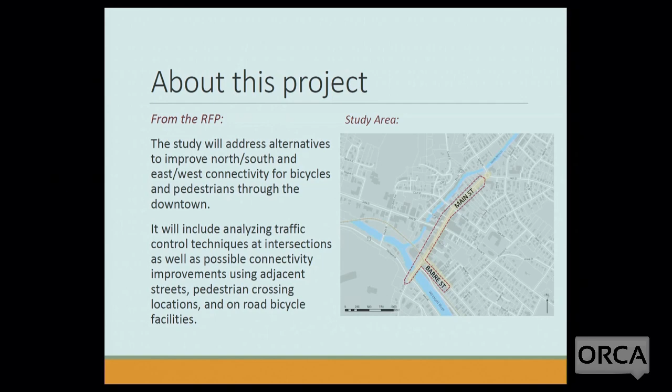So I think without any further ado, Lucy. Great, thanks. Well, thanks for making time for this. We really enjoyed working with Corey and the rest of the team and the city. And also give thanks to an advisory committee who met a number of times and perhaps may have one more meeting. And Donna was the city council representative, and a lot of members from other organizations and committees in town. And we had great feedback from the staff, and we had more people than listed at DuBois and King, but our core team was myself, Sophie, and Julia, who both live in Montpelier, so we're also really lucky to have in-depth local knowledge.

And here is the timeline that we did the study over. It was intended to be more about 12 months, but the project, as you'll see as we go through, gets quite complicated. We took a little extra time to consult with city departments and various committees over the course of the study. We had several advisory committee meetings. We met with MTIC, the Montpelier Transportation Infrastructure Committee, and then we also had a meeting with all the managers of different city departments. These were all really helpful, and hopefully we brought all that input, but this is a draft and we want to get more input from you all tonight and any further direction that we might need.

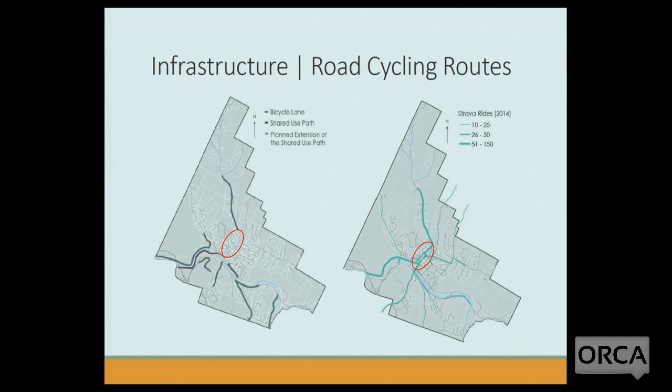The graph on the right: we have limited data on how many people ride on what streets, but we do get some data from online bike apps that people use while they're riding their bike. So it gives you an idea the places people want to ride are very much the same as they want to drive. And people want to make the connection between the paths and some of the other bike lanes in other parts of town. So again, these are the areas where infrastructure's not there, but a lot of potential demand is there.

But then there's a lot of people, and these percentages are averages from surveys done around the country, so not Montpelier specific, but no reason to think it's different. There's a big group of people that would like to ride a bike more. They are interested in riding, but they're not comfortable on what we call high stress routes, where there's a lot of traffic and no designated lanes or space for them. So really, to get more people riding in Vermont, which is the vision put out in the master plan, we really want to think about getting those people comfortable riding on the streets or pathways.

And then we looked at a lot of different types of infrastructure. This is just a range where, on the left side, are sharrows, which is nothing more than marking a bike symbol on the road, telling traffic they can expect bikes, and showing bikes that they need to kind of ride in the lane because there's not a separate lane.

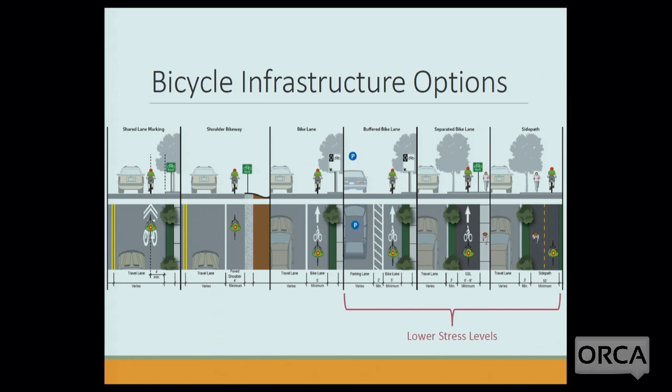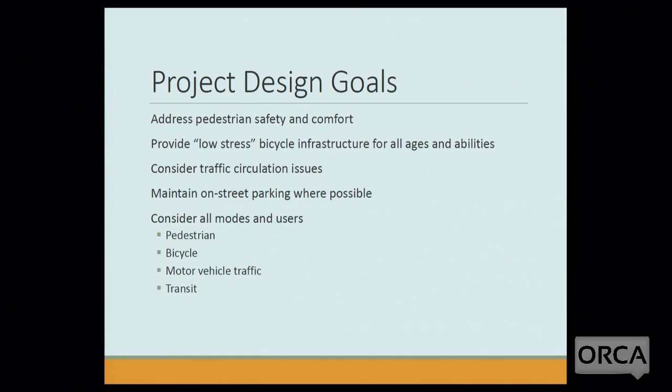And then this is a quick review of the design goals that we had in looking at alternatives for addressing this need. Pedestrians are really the #1 concern, because there are a lot more pedestrians than probably potential bike riders, and certainly existing. But we also want to provide that low stress bike network to allow a wide range of ages and abilities for people to ride. We definitely need to consider traffic circulation, because the two are all related. And another consideration is to maintain as much on-street parking as possible as a key economic and way to access downtown, and then to consider all the different modes of transportation.

So with that, we came up with 4 alternatives for different arrangements of bike lanes and intersection designs. And this is for Main Street, and then we have a couple for Barre Street I'll present later. We'll go over these quickly because these were studies that we went through, but basically the first is having traffic signals at all the intersections that need a signal, and that would be definitely at Barre Street, potentially at School Street. We did look at the School Street, Main Street intersection, and it could be signalized. It has enough traffic. It doesn't have to be, but that would be an option.

The second one is roundabouts at all the intersections, and also providing bike lanes. When we put those out, we had a lot of interest in the committee to have a third option, which would be roundabouts at some intersections, signals at others, and particularly a roundabout at Barre and School Street. And then the fourth option is really inspired by the Greening America's Capitals report, and that was a plan that looked at changing the intersections and parking on Main Street, and assumed bikes would use Elm Street and go through the Heaney-Jacobs lot, I think it's called, if I'm pronouncing it correctly. So I'll go through these with a little more illustration.

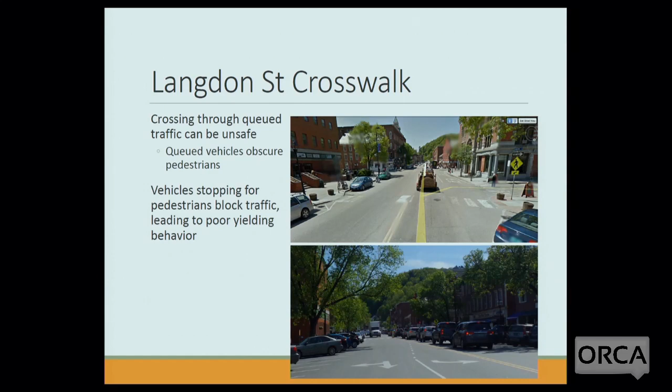So, and then the Langdon Street crosswalk was one of the topics that we looked at, and what I'll show here. We looked at a few options to relocate it. So on that diagram, the white crossing right in front of City Center is the existing crossing. One option we looked at is to bring it down, basically make it part of the signalized intersection at State Street. Another option was to move it up to the alley there, and I'm forgetting the name of the street, but it's the little Hazen Place.

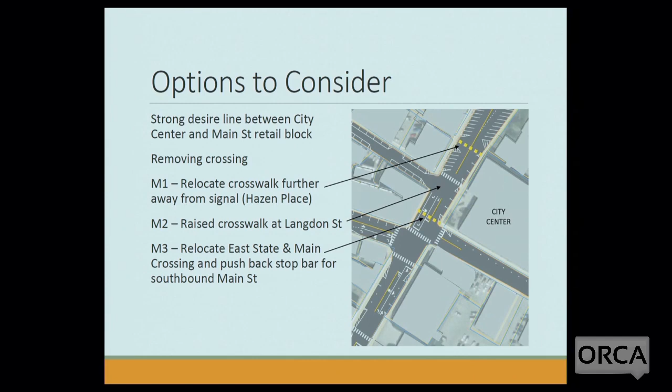And that seemed to be the one that's most preferred, and I think this is probably a topic that might have more ongoing discussion. But that brings it a little bit further from the traffic lights, so it's not so abrupt that you get through Main and State and immediately stop for a crosswalk. It'll allow a little more room for cars to stop and not feel as much that they'll get rear-ended. It's probably not going to solve every issue, but that seems to be the one that garnered the most interest in thinking about changing.

So Main and School was another concern, and again, it does meet traffic signal warrants in terms of its volume. And we were asked to look at an all-way stop there by a lot of people in comments we got, and we did look at that, but it's not a good candidate for that because there's a lot of traffic on Main Street compared to School Street, whereas the other intersection that had this treatment recently, which is Elm and Spring, has much more balanced traffic, meaning the traffic's about equal, and that's a really good place to put an all-way stop.

But this one, with a lot of traffic on Main Street where every car would have to stop, would be probably really frustrating and could create rear-end accidents. So that's just not a recommended treatment for that reason.

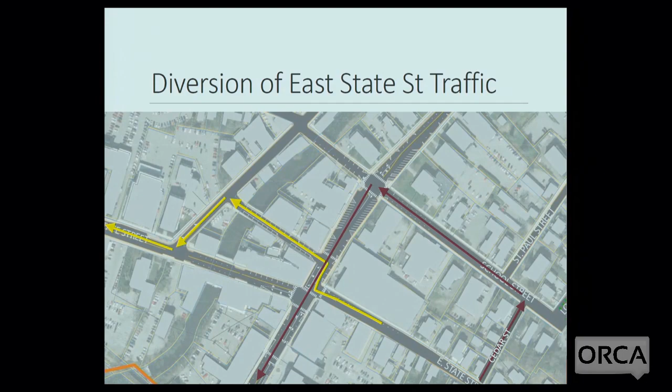And so the roundabout at East State Street, because of this and the sharing, there was a real mixed review in our alternatives workshop, so it wasn't beloved. It's intriguing, but it definitely has some concerns. And because of that, we really were asked to look at a hybrid option that would be a big roundabout at Barre Street, the first circle there, and then also a mini roundabout, or a small roundabout, at School Street. So this is what we're calling the hybrid.

And then as far as the parking and travel lanes, it's also kind of a hybrid. There's some areas that can have parking on both sides and bike lanes, and other areas, especially as you're getting near the traffic signals, where we need those left turn lanes, so we have to take parking off one side. So it's kind of in between in all those ways.

And one of the concerns of mixing roundabouts with signals is that currently there's often long queues of traffic either coming from State Street down Main Street or from Memorial Drive up Main Street. And when we have a roundabout in the midst of traffic signals like that, the traffic backing up through the roundabout will mean no one from Barre Street can move at all as those queues are there.

So it can have the effect of making it a lot harder for people to get out from Barre Street. That's during peak hour, and that's maybe 1 hour of the day, or maybe not even 1 hour of the day. So just a consideration.

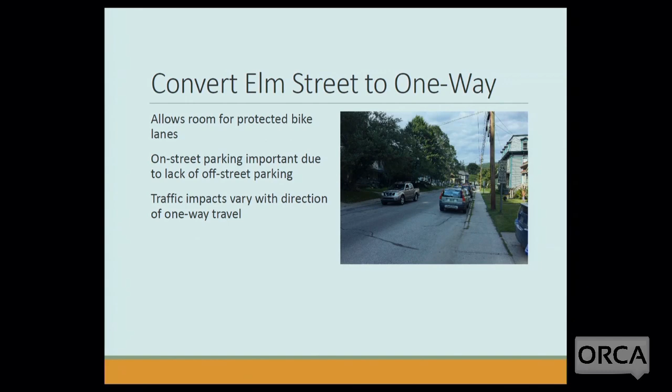So converting Elm Street to one-way would allow room for the bikes. We recommend it be one way rather than removing all the parking, because the parking there is really critical for a lot of properties that have no off-street parking. And then there will be some traffic impact as it sends traffic to other intersections. So this is the idea of what would happen.

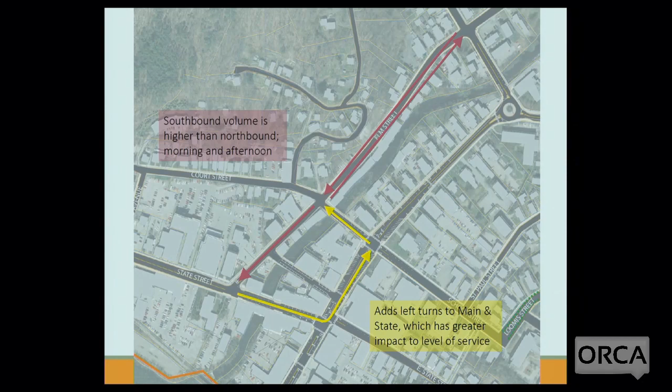So I'm not going to go through all the details, but we did a pretty thorough review of the pros and cons of each of the options for Main Street and really learned a lot about the different choices we have. And I'll get into more of the recommendations later on.

I want to then get to Barre Street, which is another important part of the study area. And for Barre Street, we looked at basically three options. One is a shared use path, they're also called a side path, on one side of Barre Street, and it would involve basically widening the sidewalk to be the same width as a shared use path. We'll talk about which side of the street it could be on, but it would require removing parking from one side of Barre Street.

And that is a continuation of the kind of facility that it's going to be meeting that street segment on either side, so that was an advantage of that. There is another option I'll show, a two-way protected bike lane, which means there's a sidewalk and then a bike lane and then traffic, or there's a one-way protected bike lane on each side. That one has to remove parking from both sides of the street, so that was one that was not really pursued further, other than to note that it was another option.

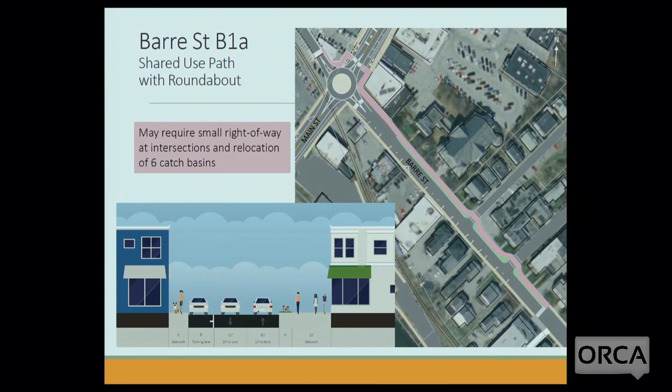And then the cross-section shown below basically shows it'd be parking on one side, two travel lanes, and then it could be up to 12 foot wide. The width might vary a little bit, but a comfortably wide path for people walking and biking to share.

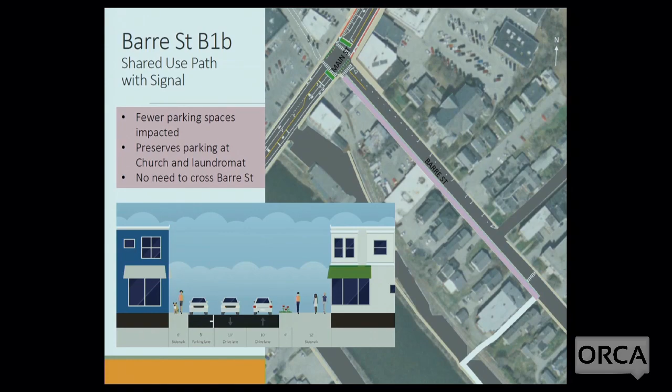It fits within the cross-section, but it's very tight, and it's probably going to be a design that's not going to feel that comfortable, both for the cars and the people biking. But it can work, it meets the minimum standards. So the winter maintenance of this will have to be really thought through. Will it be plowed? Keeping the parked car on the other side as close to the curb as possible is gonna be important, which would affect snow removal, so, you know, there are a few design challenges, but it's something that could fit in.

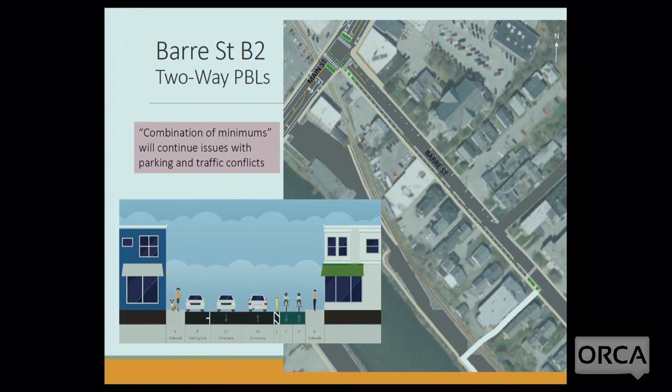And there are a lot of other things. We looked at traffic modeling and flows, and the summary of that is the roundabouts do work better for the traffic flow than the signals. But none of these were really making anything worse than it is now, so it didn't seem to rise to the most important consideration, perhaps, compared with parking.

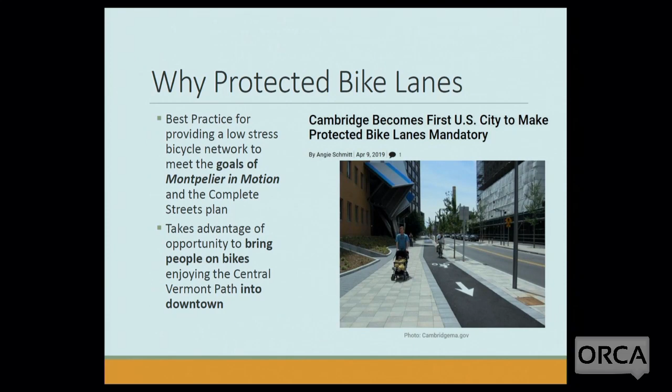That fits in. And then the sidewalks would be pretty much the same width as they are now. We're not really encroaching on them. That might vary a little from block to block, just because of the width, but they'll be at least as wide or wider. And again, here are some examples. That's the one in Cambridge. There's another example in Chicago of what they can look like. They can be a different color to really demarcate them from the sidewalk.

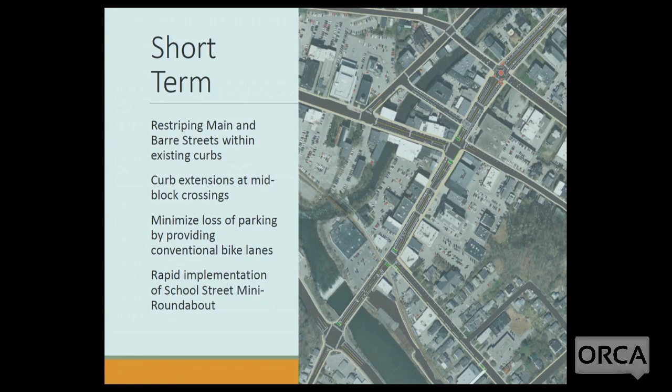And so I want to talk a little bit too about rapid implementation. A lot of cities that are wanting to really build out bike lanes, bike networks, are using a combination of capital construction and then what we call quick build methods, which is more with paint, flexible bollards, plastic flower pots, other things to help redefine the space on the streets a little bit differently to make them safer for walking and biking.

And so two of the things that could be good candidates for this kind of approach would be the Barre Street protected bike lanes, which would be the two-way bike lanes on one side, and also the School Street mini roundabout. These could be done quite inexpensively. Here's a few examples of similar projects.

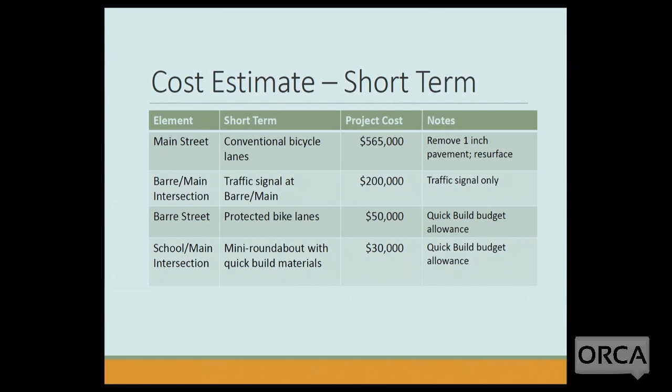Starting with Main Street and building protected bike lanes and doing some curb relocation, stormwater relocation, traffic control and other things is about 1.2 million.

Now, if you were gonna do that kind of major project on Main Street, you'd probably wanna do more with more tree planting and green stormwater infrastructure, so this cost doesn't include all those kind of elements. We're really just focusing on what is the cost to get the infrastructure for the bikes in place. And it would obviously be best to do this all in one big effort, which I think with the upcoming master planning effort, that would be the outcome of that, is knowing more about what would be included in that project.

For Barre and Main Street, we've sort of divided the signal to first put a signal in, and then the next estimate of $200,000 is the cost to do the adaptive signal control to tie it in with all the other intersections and make it a lot more efficient. And that's an estimate we got from the provider of the technology.

On Barre Street, to actually go for the long term and build the side path on the south side is about $250,000. We're assuming it's an asphalt path that involves some relocation of stormwater, a few utility poles, parking meters, that kind of thing. And then the School and Main Street intersection to do a more permanent kind of mini roundabout with curbing, more attractive, would be about $175,000. And again, these are sort of today's costs, and they could need to be escalated out in the out years.

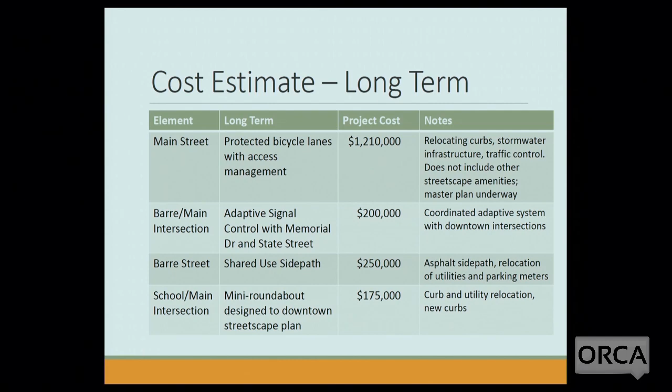So the priorities, based on really what we heard from a lot of people throughout the study: number one would be the traffic signal at Barre Street with the pedestrian crossing, an urgent kind of low-hanging fruit. Number two, the School Street mini roundabout, and again, this quick build approach would be a low cost. Number three, the Barre Street protected bike lanes, to be timed with when the bike path is complete, and so when that happens might depend on it all coming together.

And then eventually the side path, and then the Main Street design, obviously not necessarily lower priority, but a longer term action where there'd be some more master planning done for the whole streetscape that would be important to combine them.

So our next steps: we'd like to get input from you, and city staff is reviewing it, and the committee, and by the end of April, we'd like to get all that input and make revisions. We have to have the report reviewed by VTrans. They provide the funding for the study, and then once we get their comments, final revisions. And I don't expect major comments from them. And we'll try to close this out by the end of May is our goal, when there'd be another city council presentation. The one thing I would add to this slide is it will go to the Transportation Infrastructure Committee again before it comes here.